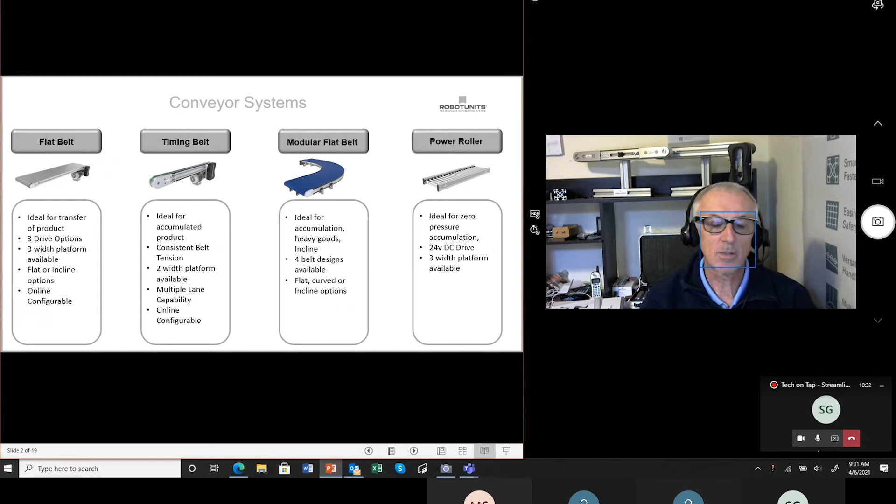So the first thing I want to look at is the different types of conveyor systems you have. You typically have flat belt conveyors, timing belt conveyors, modular flat belt conveyors, and powered rollers. That's the kind of main categories that they come in. And they all do different things. So for instance, your everyday garden flat belt conveyor, which I'm going to switch cameras over to here now, and you should be able to see this.

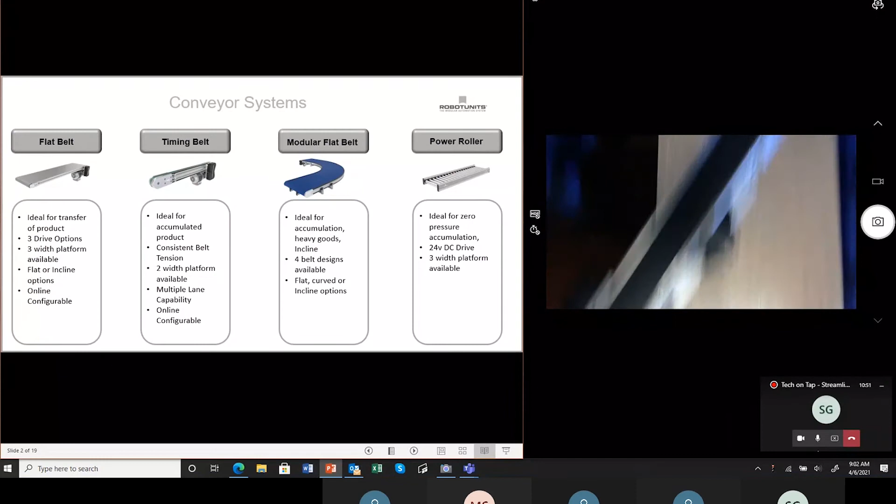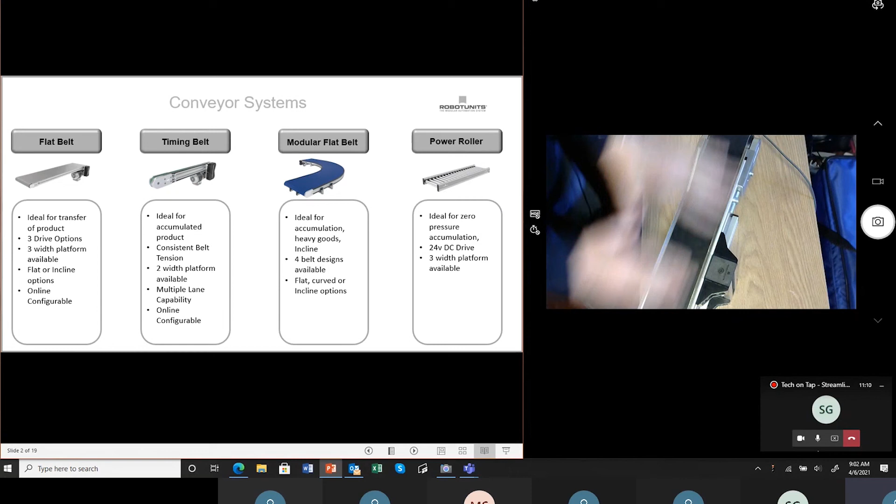When we say flat belt conveyors, this is the type of thing that we're talking about. And it's ones that we're all familiar with. You have a belt on two rollers that are under tension. There is a stainless steel plate that runs underneath, and it will transfer product from one end to the other. Now, this is great for moving product that you want to move at a constant speed and feeding down through lines. You have different drive options, different width platforms. You can also do these as flatbeds, or you can actually do them as inclines. What's really nice with ours is you can configure these online.

The second system that we have is what we would call more of a timing belt. Now, a timing belt is usually a lot smaller, a lot thinner. You can use them in conjunction. So for instance, if you imagine you had a large plate glass window that you're moving, trying to do that on a traditional flat belt conveyor system would give so much weight, so much friction, it would be very hard to move. So what you can use this for is, this would have 2 or 3 touch points. They work in unison with each other. So you've only got the load on 2 separate ends or 3 separate ends.

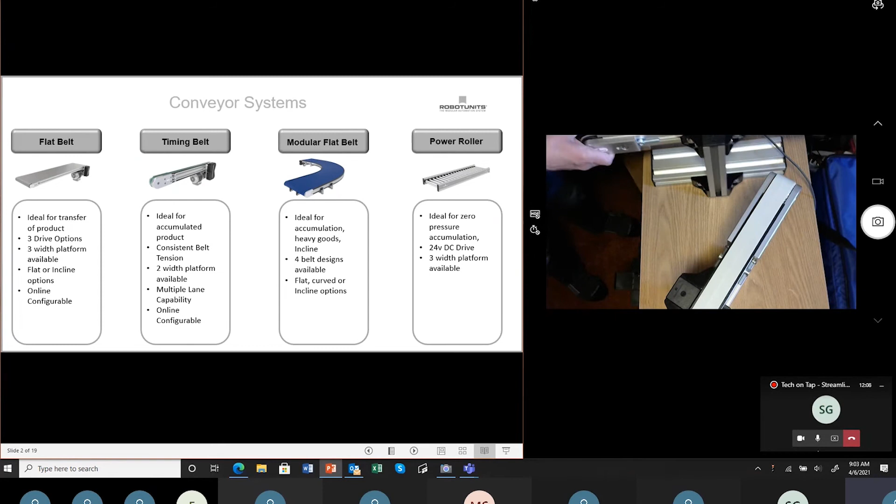It's also very good when you want something to inch very close into the feeding line. So you could have a standard conveyor belt taking the product away, and then you could use this to feed. So you may have 5 or 6 bottles that you want to feed on at a time to then take on this other section. So these are the main ones that we can do. And again, like most of our conveyor lines, you can do these online. We've got 2 width platforms.

One of the benefits you have with a timing belt is you have consistent belt tension. A flat belt, as it operates, it's like anything. It's like being on a treadmill. Your belt will stretch over a period of time. With a timing belt and with a modular flat belt, you don't have that problem because they've actually got tensioners on them and they've got sprockets, and it stops that from happening.

Modular flat belts have really come into their fore in the last 5 or 10 years. You've got different belt designs. You can do flat, curved, and incline options. They're very flexible. You can do different materials. You can do metal. You can do plastic. So there's a lot more flexibility with the modular flat belt.

Powered roller conveyors are ideal when you've got zero pressure accumulation. They tend to work on 24-volt DC drives, and we have got 3 width platforms. You might see them used in moving boxes around. They can go forward and back. They'll take a lot more weight and a lot more heavy duty stuff on them.

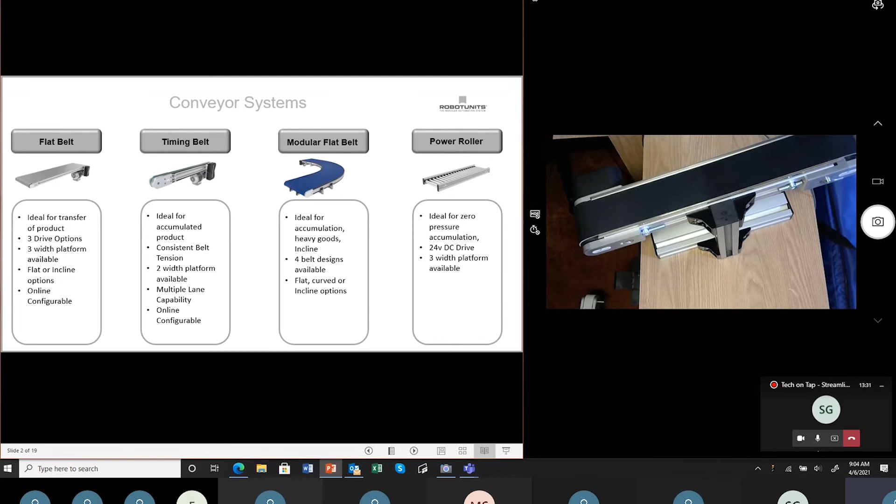So what are the main components? Well, in a flat belt conveyor, you've got your drive options. So your drive options on this particular unit, you can see we've got a timing belt on here. So you would have 2 gears. There would be a tooth belt between them. Then the motor would sit at the back. You could also direct drive them. All right, but these are the main ones.

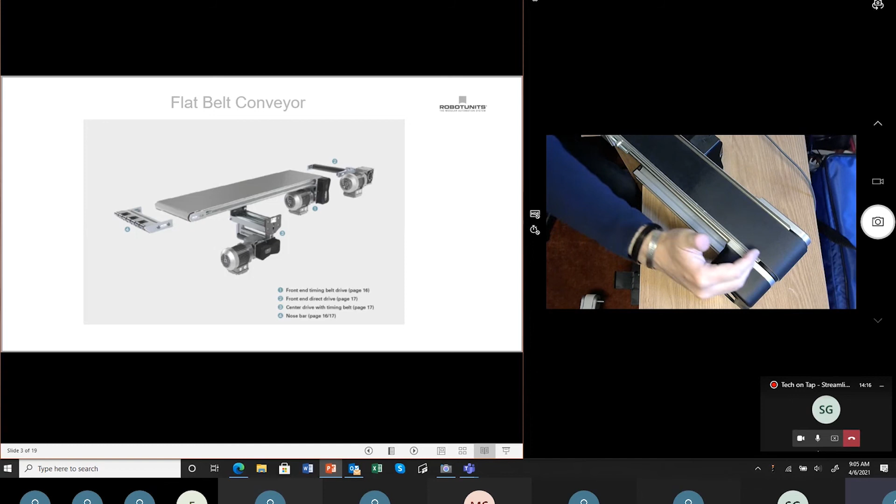You then have 2 rollers either side of the belt. You've got a length of belt, and then you have a single piece joined belt of the material. You can then have a nose bar on the end of it. You can see here. You can have different options. You can put the drive at the front, right or left, rear, right or left, or you can put it in the middle.

So on the belts that we do, we have one that's based on the 40 series, which is our 40 by 40 extrusion. That will take from 40 millimeters through to 400 millimeters on width. And you can also convey a weight of up to 240 kilos or 500 pounds. On the 50 series, that will go from 400 to 600 wide. It will also take a weight of 340 kilos.

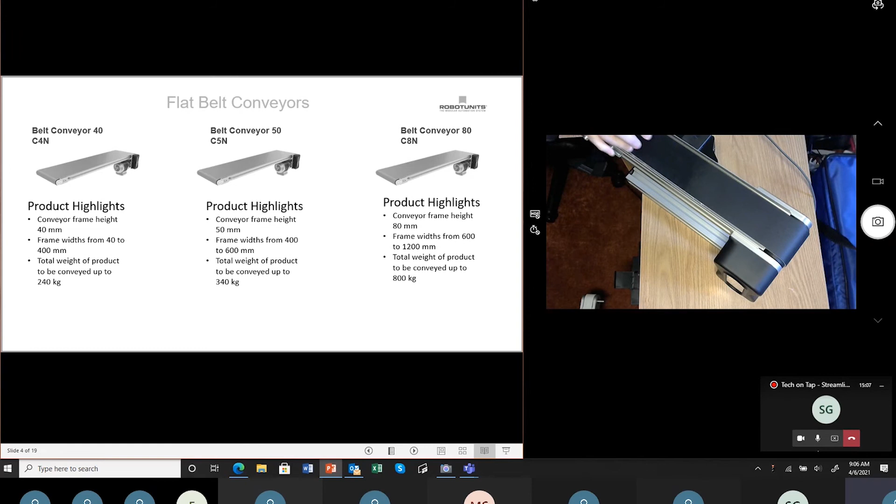On the 80 series, that will go from 600 up to 1200 wide, and it will take a total weight of 800 kilos. Now, in addition to that, when we say that's the width of the frame, a 1200 millimeter frame width will not move a 1200 millimeter product. It's usually always smaller than that because you need to have some gaps.

So what are the factors? You've got free choice of dimensions, belt properties, belt speed, as well as the drive and idler options. 5-day lead time for express delivery. We can actually get these out in 5 days, and you can configure them online and download them and get your CAD data for when you're designing them.

Some tips and tricks, some of the benefits, obviously, price and performance ratio for customized solutions, quick deployment and short depreciation period, and time savings for quoting, because you can literally get a quote within 30 seconds. Some little tips and tricks that we've found. Always try and have the motor pulling the belt instead of pushing it.

And the reason for that is this works on the principle of friction. So what's happening is you've got a stainless steel plate that runs underneath the belt. You load it up, it will move the belt, so there is some glide and some friction on there. If you're pulling the belt, you're always pulling the belt under load. That means that you're going to be at the strongest tension here.

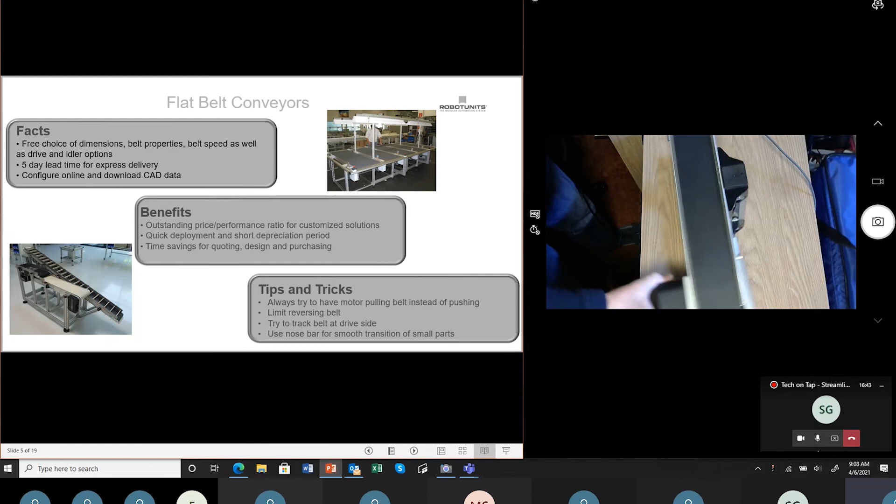If I had this at the rear end, I would be pushing it, and you would have the potential, when I put a load on this, for this belt to bunch up. So always try and have the motor positioned so that you're always pulling the belt. Okay. Also, second tip is tracking. Tracking the belt is one of the things that causes most of the issues. And again, what I would always suggest doing is try to track the belt at the motor end.

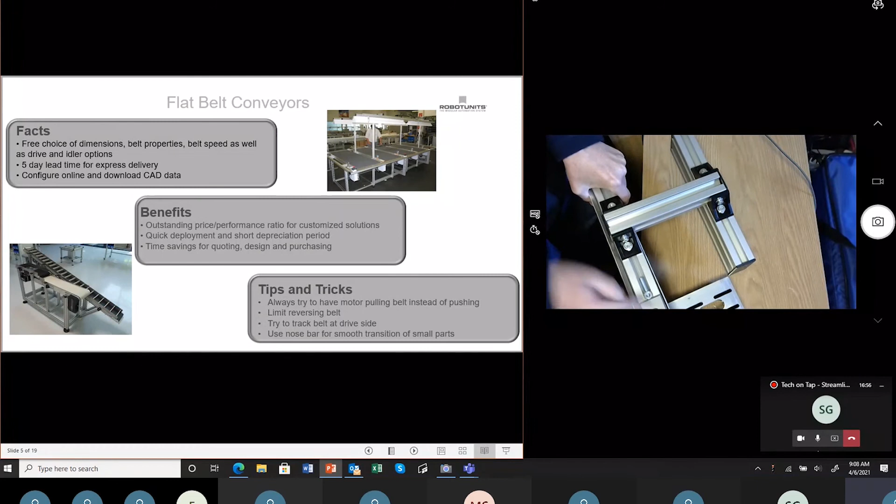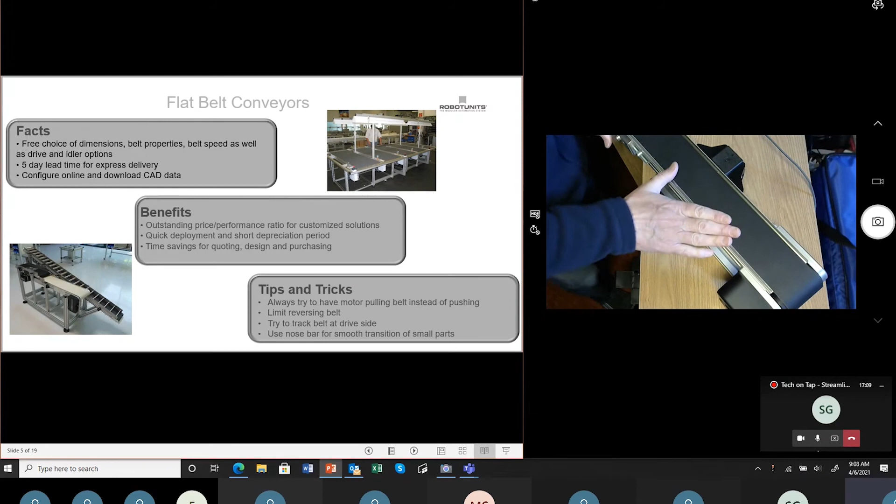So if you look here, you'll see our tracking system gets done by these two units here. So you would back off the actual bolt, tighten the bolt 1/4 turn at a time, and that will move your belt left or right. Okay. Now the reason that I say always choose this area, and it's a common thing that I've seen happen a lot, is we start at this corner, then you go to this corner, then you go to this corner, and you end up chasing your tail all around it.

So if you always track on one corner, once you have this belt tracking at this end, by the laws of physics, this bottom end will always fall in line with the tracking. So you're not always going to run around the 4 corners. The other thing to do when you're doing this tracking is always give yourself enough time. So when you're doing small incremental turns, always give the belt at least 10 minutes to run round.

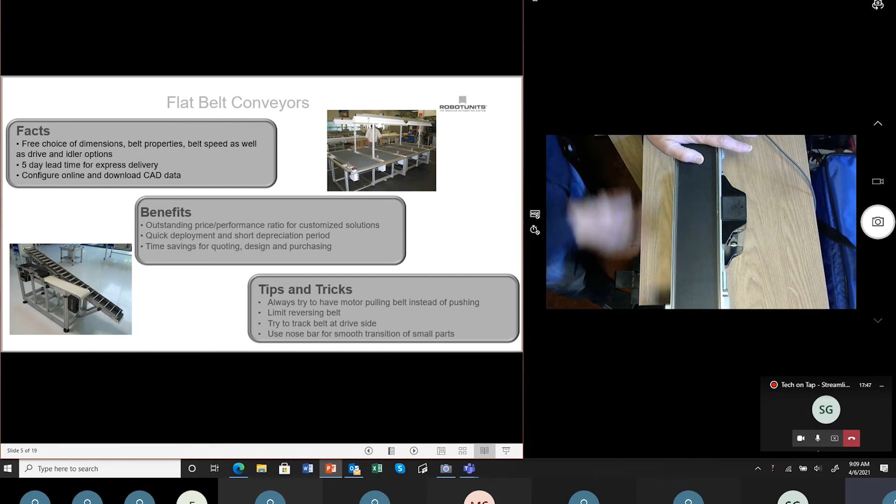Because again, I've seen people turn it, not giving it long enough, and the next minute, all of a sudden, this belt will move to one side and you'll rip the belt. So if you take your time with it, give yourself 10, 15 minutes, always do the belt with no load on it, and you will always get the free tracking.

Now, the great thing with the conveyor systems that we do, we already pre-tension them and we pre-track them. So 99 times out of 100, these are ready to go straight out the box. So you won't have to do that. But as belts get worn, the longer they're in service, you may have to do that little bit of small adjustment on the tracking front.

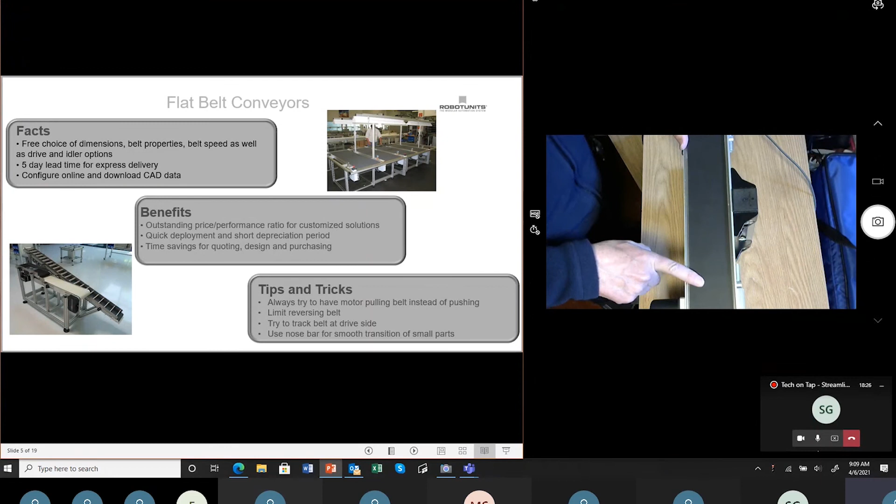So always just track at one corner. And like I said, once you have one side running, the opposite side will automatically run in there. It's just one of the laws of physics.

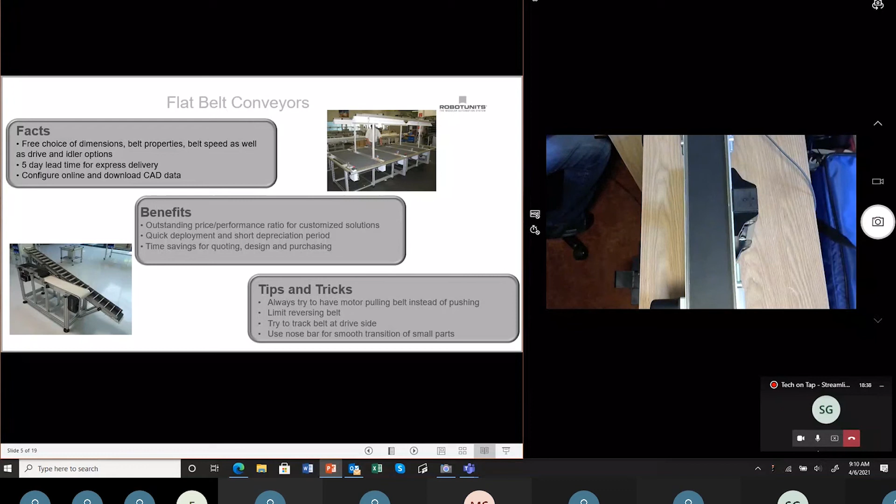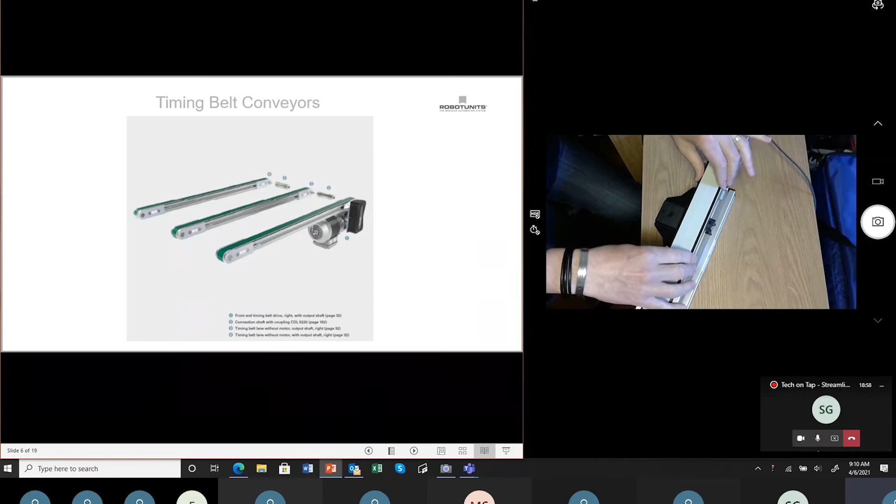Let's look at the timing belt conveyors. They look very similar in their setup. Some things are different though. Again, you have the direct drive option, or you can do timing belt options, and you can put them at the front or the back. But the main difference is the belt itself is cleated and it's steel reinforced. Also, instead of having smooth rollers on the end, you've actually got sprockets.

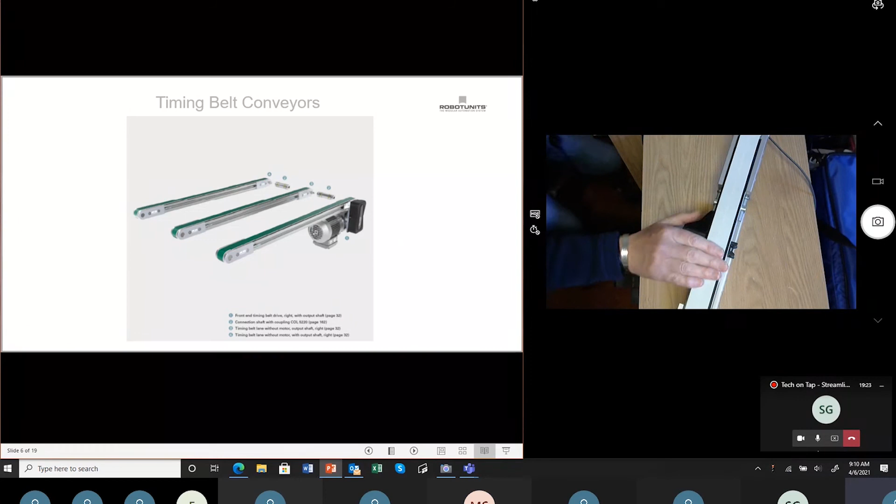So what that means is this belt will not go out of alignment because the sprockets are continually keeping it under tension and continually keeping it straight. So once you've got one of these timing belts in, they will run a lot smoother in terms of tracking and any adjustments that you have to do.

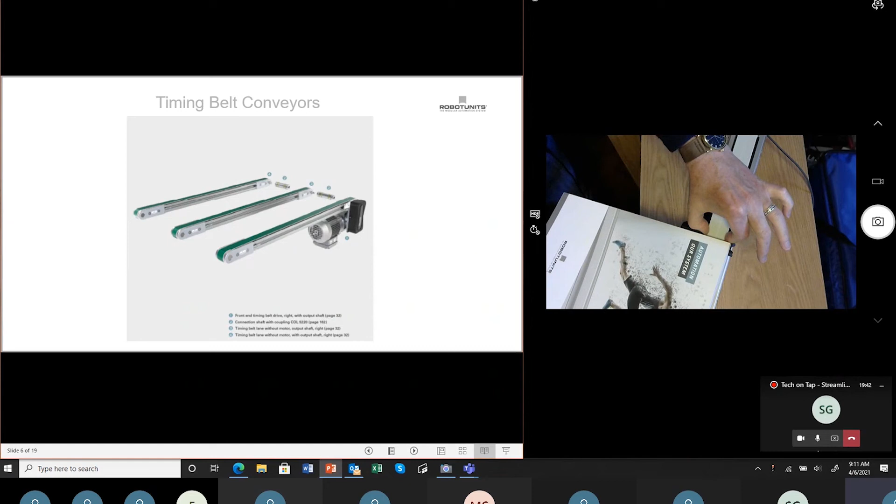And you can also build them up in 3. So as I said, they're ideal for when you have, for instance, a large product. If I was to put the book on here, I could run 2 of them in conjunction, and I've only got load centered on here. Whereas if I was doing this on a flat belt, the whole load would be right across the unit, so it would be a higher area to move at any one time. So they're great for doing plate glass or car bodies or that kind of stuff where you have a large surface area and you only want 3 minimal points of contact.

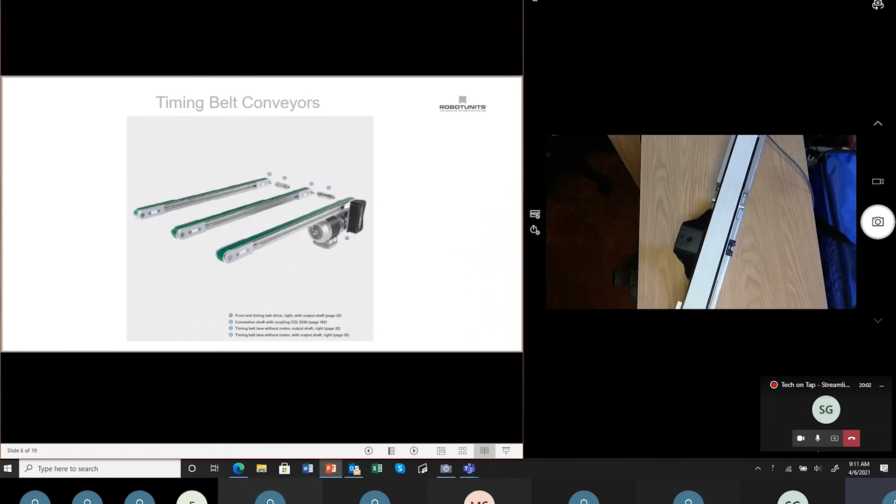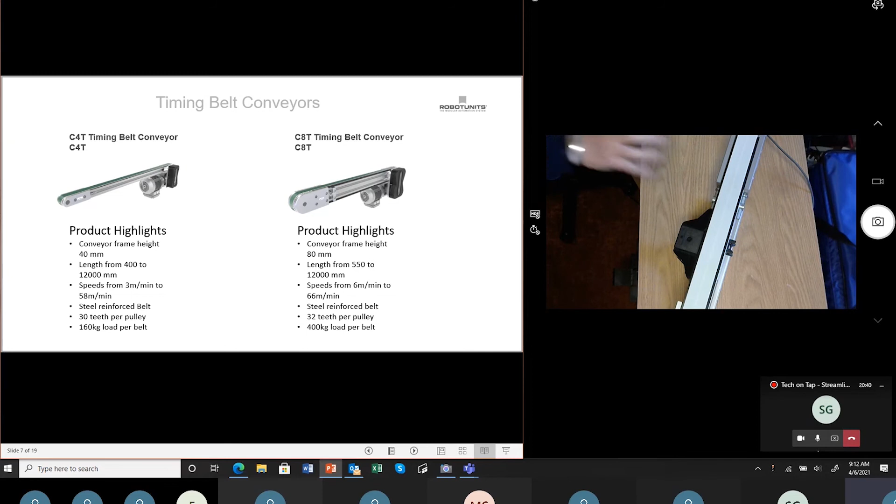2 product frames: we've got them on the 40mm, and we've also got them on the 80mm. You can go from 400 to 12,000 millimeters in length. Your speeds are 3 meters per minute to 58 meters per minute. Steel reinforced belt. The smaller unit has 30 teeth with 160 load per belt. So if I was to take 3 belts, it would be 3 times 160 as the potential load. The larger one, it would be 3 times 400. So you can see that's why they're ideal as opposed to a flat belt. You'll get less slippage, and they're much more suited for these larger products that you want to move.

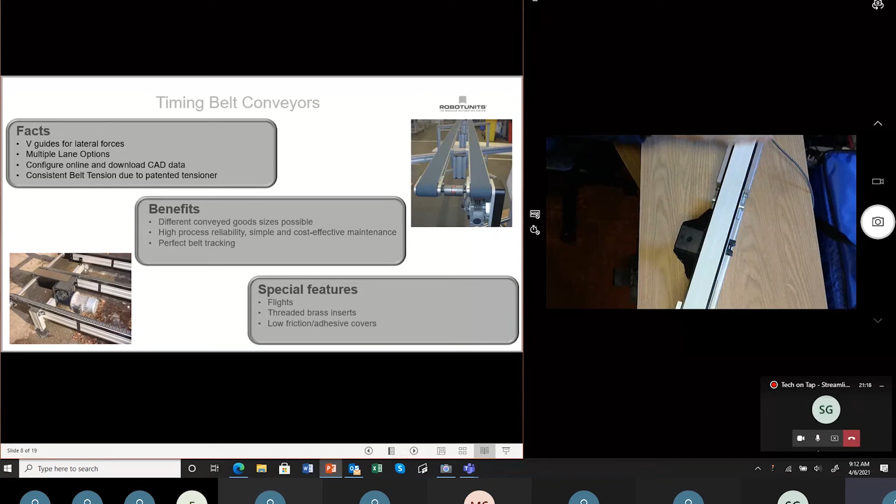You've got V-guides for the lateral forces. You've got multiple lane options, and you can see in this picture down here, you can either have belts or you could even put chain in here. You can configure them online and download the CAD data like you do with the other ones. You have consistent belt tension due to the belt tensioners that we have on here. Different conveyed good sizes are possible, high process reliability, and perfect belt tracking. Also, they inch really well for when you're wanting to get something in at a certain time onto the actual on-ramp. You can use these really well with sensors.

Modular belt conveyors. A modular belt conveyor is similar to a flat belt, and it takes what you've learned from the flat belt and the timing belt together. So with a modular belt conveyor you have the flat belt base that you're used to. At the end now, instead of plain rollers, you've got rollers with sprockets, and they will pick up the little spaces in between the belt system. Each section's about 1 inch wide, and it will move the unit round. So you've got the benefit of not having to worry about the tracking. It stays in perfect track.

There's also a little bit of sag in the belt underneath here, and that stops the belt from bunching up. So that allows you to move forward and back. With a flat belt, you would always just go in one direction. You wouldn't be able to go front or back. With a modular, you can reverse it really easily without having to worry about the tracking going out.

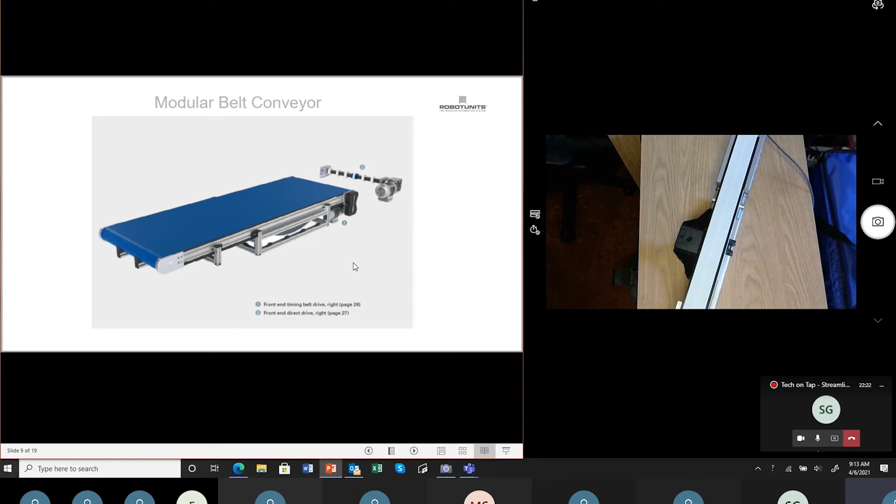So again, we can do it from 1500 to 12,000 millimeters in length. Speeds we can achieve are 6 meters per minute to 50 meters per minute. You've got multiple belt options, whether it be plastic, metal, hard plastic, soft plastic, whatever. We do a 1 inch belt pitch, so each of the modules are 1 inch incrementals, and you can take 750 kilograms load per belt.

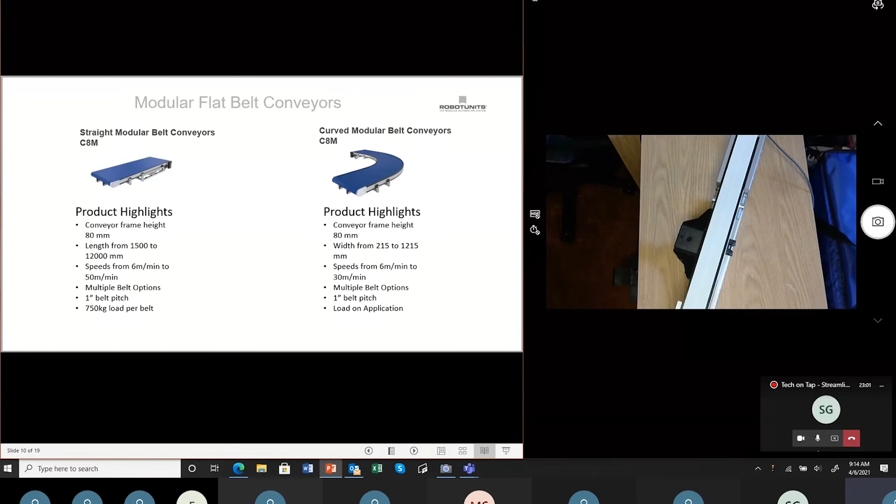You can then combine them with curved belts, which is really cool. So now you can make a system where you would have a curved and a straight. So it gives you a lot of flexibility in your designs. And you can see some of the pictures here. So you've got a flexible layout. The modular belt catenary sag with the safety cover means that the belt isn't going to bunch up on you.

And your belt guide and sprocket ensure your belt tracking stays in place all the time and all the way through. You can combine straight, curved, inclined sections, giving you greater flexibility. There's no pinch areas, which is really good. And you can do lateral push off of the product, which means that you've got low maintenance.

The applications: it's great for accumulation, incline, the transportation of heavy goods, and conveying parts with sharp edges. So you could have stamped goods going on there. If you've got a heavy duty plastic on there or heavy duty metal, you're not going to get that cutting the belt.

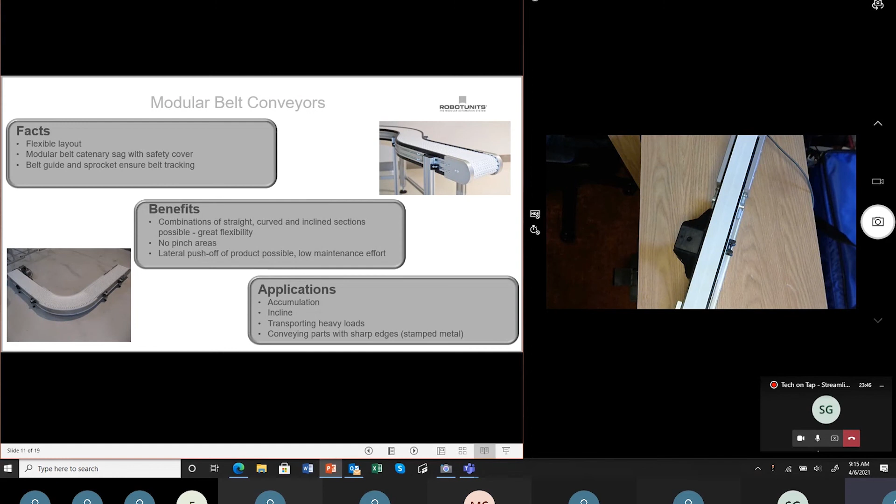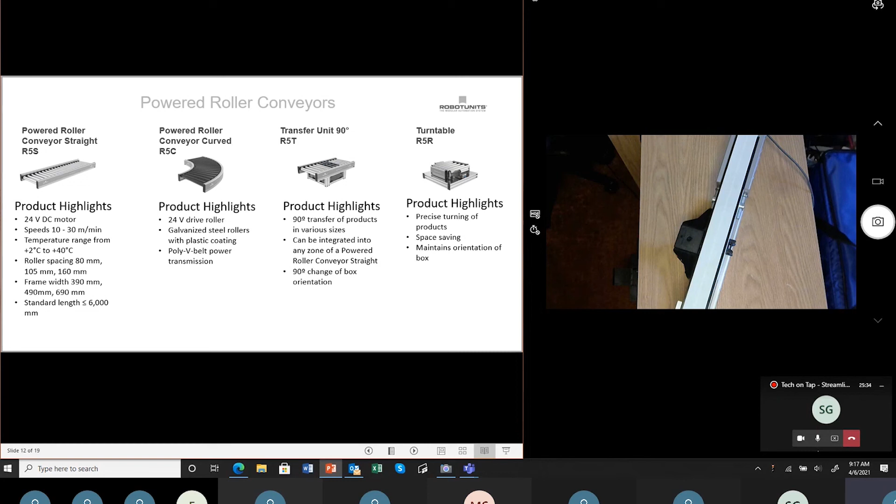The plug and play fully integrated controls. So we can play with Ethernet, we can play with Profinet, we can play with IO Link, we can do all sorts of weird and wonderful things. You just plug and play them. We have a variety of the modules. We can do the galvanized steel. Some customers ask us just to do steel itself.

We will do that. You can change a belt really easily. If you break a belt, you can run it over the 2 of them. Similarly, if you damage a roller, they've got very low maintenance on them. You can also do zero pressure. It's energy efficient, and you can convey in all directions.

When you buy it from us, you have immediate deployment. We actually run all the product and test it all. So you can just put it straight in, it's ready to go. You don't have to worry about tracking or anything like that. You just set the height, put it to the floor, and away you go.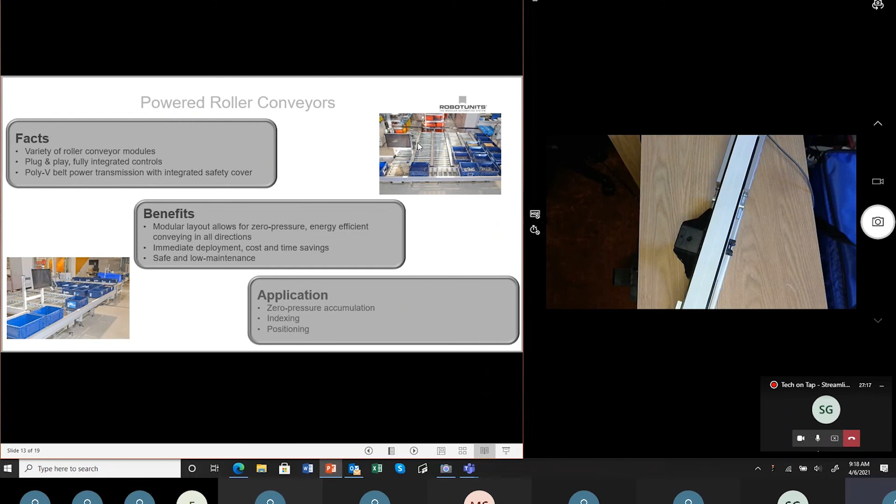They're great for zero pressure accumulation, indexing, and positioning of boxes. So if you're feeding a line and you have several sub-assemblies, this would be brilliant. An engine block, for instance, you can take that in and out of each of the machines to do different parts of the machining cycle on it, and keep your line. Then you would have a central line here running it, and then each one can feed into the robot, which would do the machining, and then feed it back out into the line for the next station, for the transfer stations.

Our linear motion, I'm just going to touch very briefly on it. What we have is the powered roll, the timing belt conveyors. We have a toothed steel reinforced belt, two sections on here. It runs across our aluminum extrusion, so it runs along the top edge of the extrusion, then runs along the internal part of it. So it's going to be protected every time.

The pulley system goes on the end, so it comes round the pulley. You then have a carriage plate with a roller. You have a hardened part here that basically allows for the carriage plate to run backwards and forwards. Now the carriage plate has actually got its own cleaning, so it's always going to be self-cleaning and self-lubricating. You can put oil in a little felt washer in here, so it really is low maintenance.

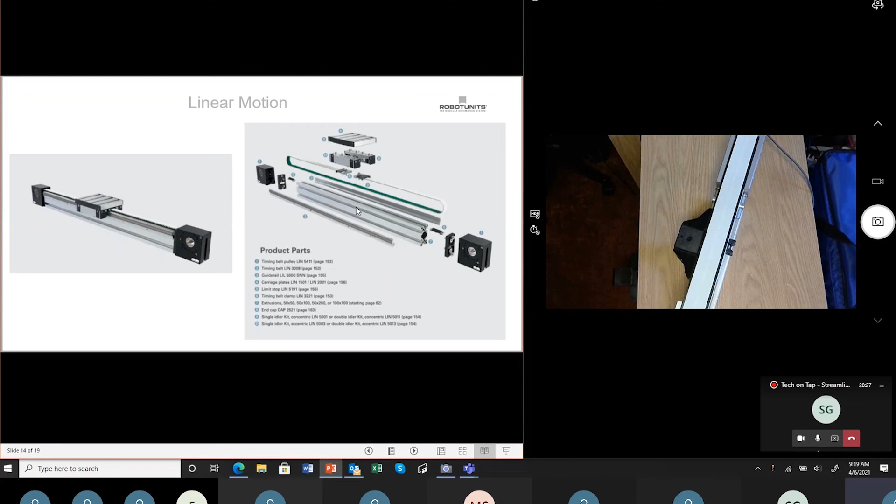You can get very accurate readings on this, so you can use this for a gantry system, or you use it for a positioning system. You will get very accurate readings every time, and it will repeat over and over again. So we do a 50 millimeter, which is our 50 by 100. We do 100 millimeter, which is 100 by 100. And then we have what we call the Omega one, which basically is the carriage on the opposite way.

But you can see you do 200 millimeters per stroke of revolution, and your accuracy is 0.2. So it's really, really accurate stuff. So if you're doing an overhead operation, drilling or whatever, and you need to make sure it comes down on the same part every single time, you can use this linear motion to actually do that.

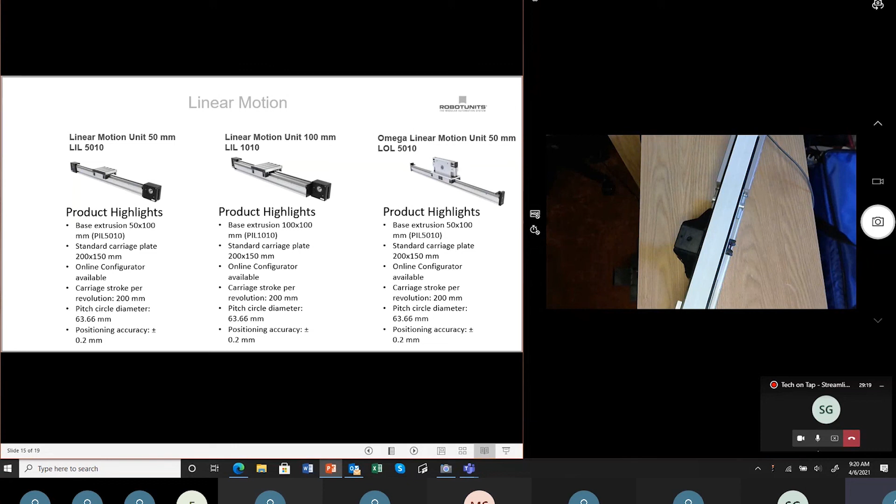Again, you can configure online. We can get these out within 3 to 5 days to you, so you don't have to worry about waiting a long time for these. We can do semi-customizable solutions within 3 to 5 days. So, simple modular design based on the 50mm series with up to 12-meter lengths possible. It's compatible and integrated with our entire modular automation system.

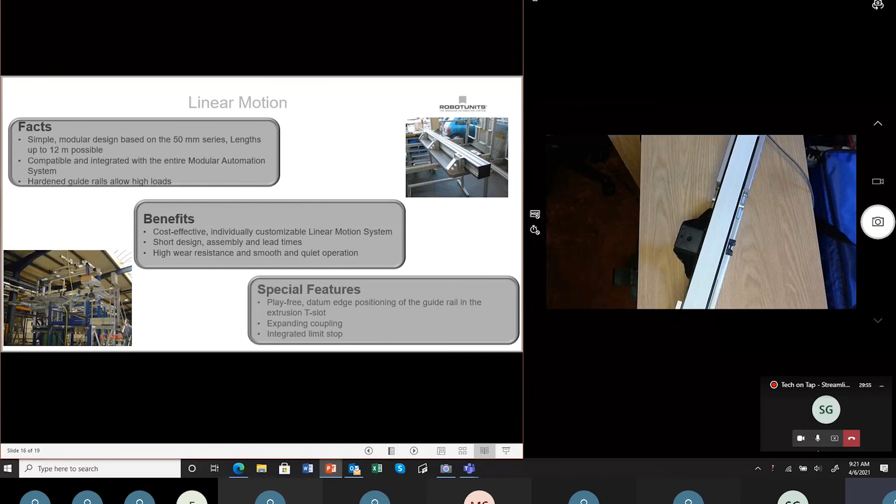The hardened guide rails allow for high loads. It's cost effective. It's individually customizable to what you need. Short design and assembly lead times, high wear resistance. You have a play-free datum edge for the guide rail and the extrusion T-slot, so that means that you're always going to be true every time you use it. You can use expanding couplings, and you can integrate a limit stop on there, so you can figure out where you want this to stop and do a hard stop every time.

We can also do complete solutions. This one started life just as a simple conveyor. Then we added the frame system around it to hold the conveyor in place. Then we wanted a little frame to hold the box. We were able then to put in a frame system at the back to site your HMI for your vision system, your control box, an inverter drive for speed, and then add your safety that you need. So you can actually get complete solutions through ourselves in Electromatic, and they all fit really nice together.

One of the things that you'll notice as you start working on these things is the need to add vision systems. And it's really simple. Because all of our products are compatible with each other, all you need to do to add a system together is use our modular automation system, attach the fastener to the bottom of it, take your mating part, put in your drop-in nuts, slide in your bolts, tighten them up. I'll just do one side.

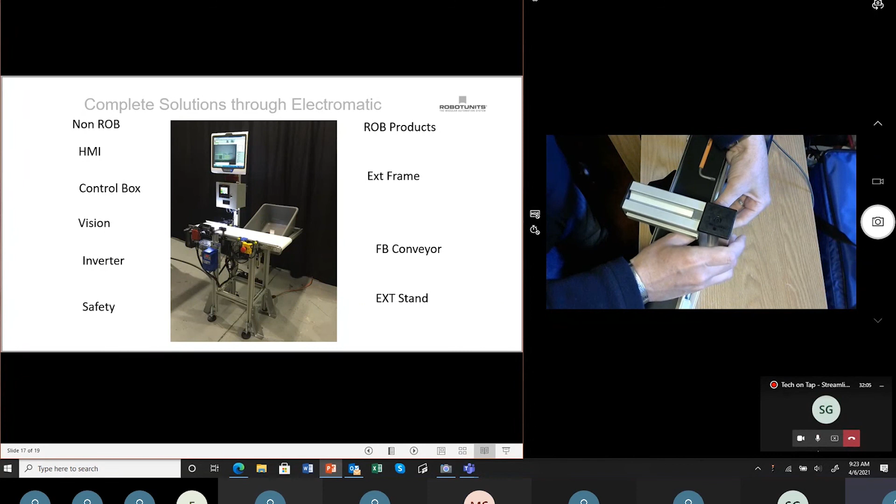And this can be used on anybody's conveyor system. If you've already got that, you can actually use this. You can drill a hole, put this in, then this will allow you to slide up and down. So you can really add the vision and the web stuff that you need for your sensors. Real simple, real easy. So we're coming to the end before I open it up for questions.

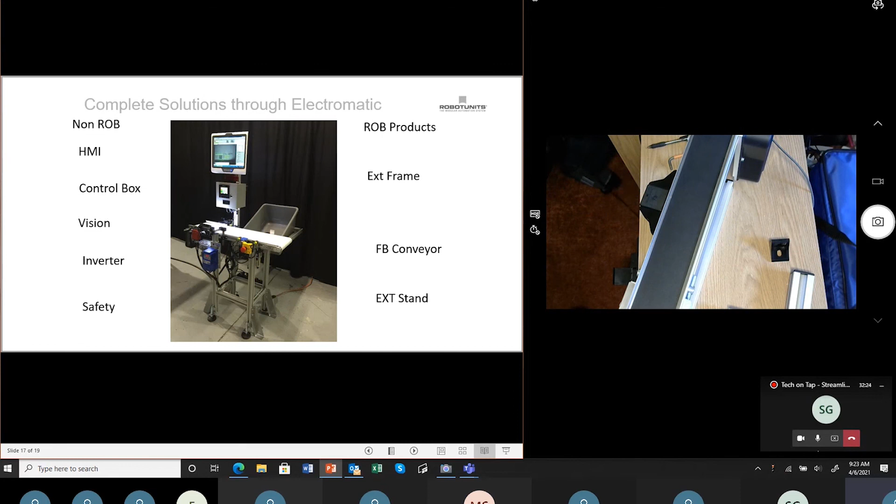So I just want to leave you with some thoughts, some general tips and tricks for conveyor systems. And whether you're using ours or somebody else's, these are some general tips and tricks for you. One, always choose the correct belt for the application. And that's this part here. If you've got sharp parts that are coming off, you would want to use something that's cut resistant.

Otherwise, you're going to be replacing these belts all the time, because as the sharp parts come off, they're going to start cutting through. If you're in a secondary food line, you want to use a food grade belt, that kind of stuff. So always try and make sure you get the correct belt for the application.

Adjust your conveyor belt without products on the belt. If I'm moving something, when you're doing these adjustments, always do it unloaded. All right. Because if you do it loaded, you could run into a lot of trouble. If you do it unloaded, you know it's all going to be running true before you do it.

Apply the correct tension to the belt. This is really important, and it all depends. There's a certain percentage, certain level you do it. And what you would do is you would mark the distance on here, tighten her up, and then you'll be able to see how far the deflection is. All right, we can walk you through that.

But again, whatever belt you're using, it doesn't matter. Whatever belt or whatever manufacturer, always make sure you've got the belt under the correct tension. These are all things that I've found during industry, that if the belt's not under the right tension, you're going to get sticking to the belt, you're going to get slippage of the belt. So always make sure you keep your belt under tension.

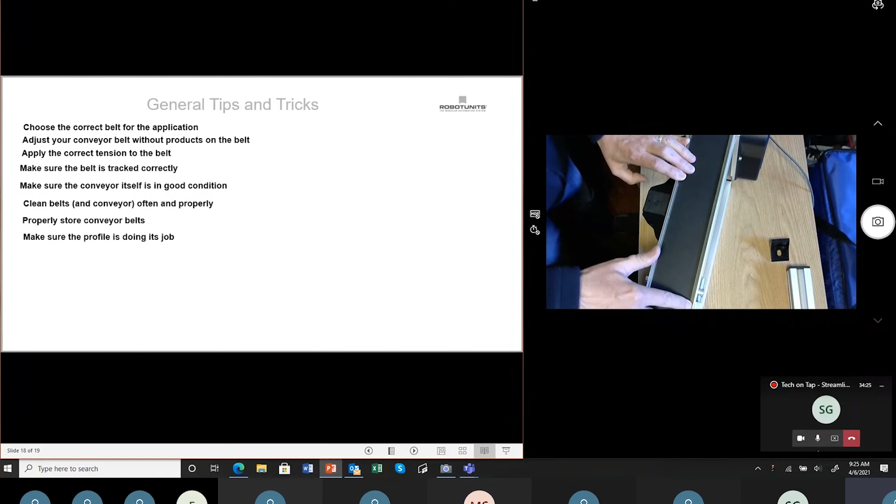Make sure the belt's tracked correctly. A lot of times I've seen, as time goes on, belts wear, the tracking moves, and you start fraying along the edge here. So always make sure you've got your belt tracked. It's always a good idea to check your conveyors on a regular maintenance schedule and look at these points just to do a visual check.

Clean the belts. Because a lot of times I find people don't clean their belts, and what happens is stuff gets underneath the belt and causes damage to the belt from underneath. So always make sure you're properly cleaning your belt. Clean them off and clean them properly.

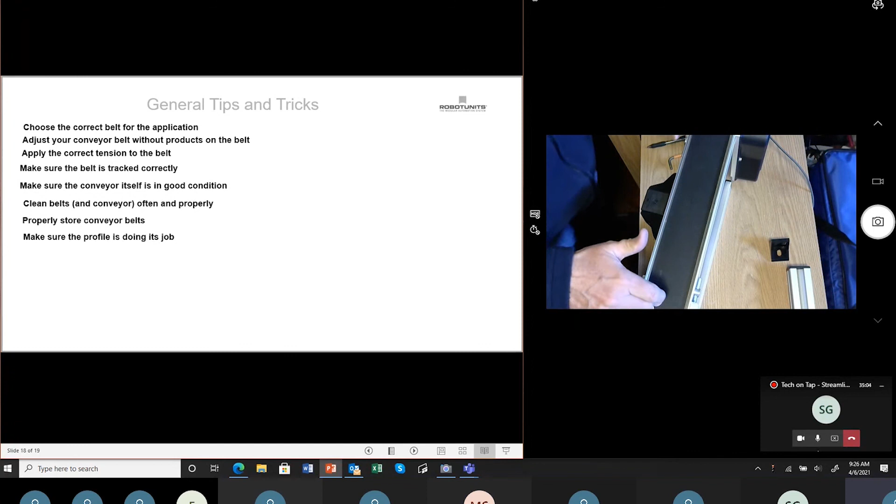Properly store your belts. I know it sounds crazy and it's simple 101, but if you've got spare belts and you've not got them stored properly, the belt could stretch, or if the temperature's too much, or if you stack stuff on top of it, the belt will then get a kink in it. So always make sure you properly store your belt, and make sure your profile's doing the job.

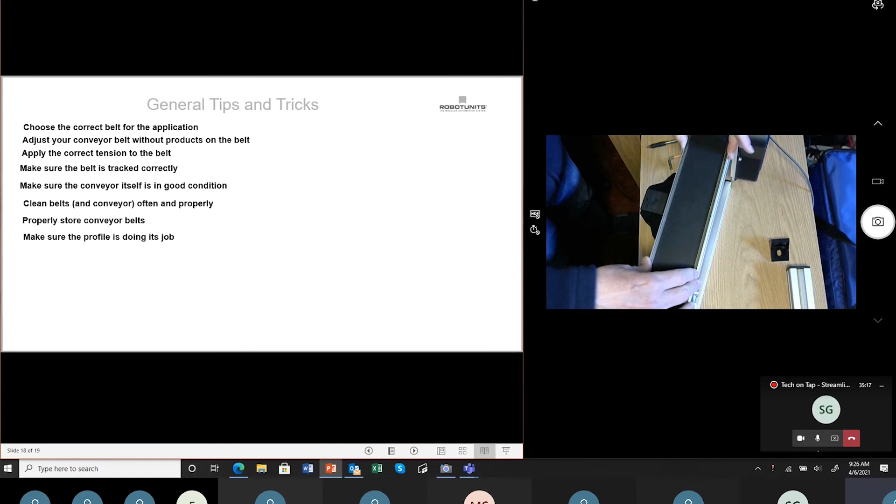All right. If this profile gets worn or damaged, that can cause damage to the belt. So always make sure when you're checking this profile that there's no damage and no wear on it. All right. So with that, ladies and gentlemen, that concludes the quick presentation. Hopefully it gives you some general tips and tricks.